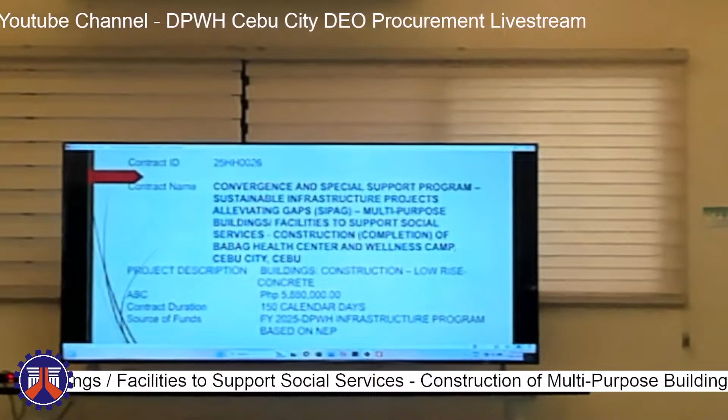5,880,000, with contract duration 150 calendar days. Source of funds, FY 2025, DPWH Infrastructure Program, based on NEP.

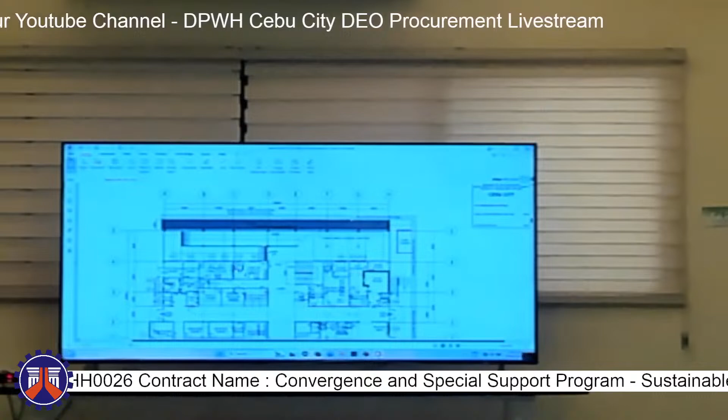To discuss the scope of works, here is the existing building. So the main scope is to just continue the existing slope protection located at the rear side of the building, on this side, for 26 linear meters, continuing the existing slope protection found on the right side of the building.

For the items, we have A1.16, provision of combined field office. A1.115, operation and maintenance of the temporary field office for the engineer. Part B, B3, permits and clearances. B5, project billboard signboard. B7.1, occupational safety and health program.

B9, mobilization and demobilization. B20, temporary fence. The temporary fence is needed since it's inside the school premises — not exactly inside, but near a school, where students pass by, so we need a temporary fence. For Part C, earthworks: 801.1, removal of structures and obstruction.

803.1A, structure excavation, for the footing of the slope protection. 804.1A, embankment of structure excavation. 804, gravel fill. 1601, fill and backfill.

And Part D: 901C1, structural concrete for the slope protection. 901C2, structural concrete for footings and slab on fill. 902.1B, reinforcing steel deformed, grade 60. 903.2, formworks and falseworks.

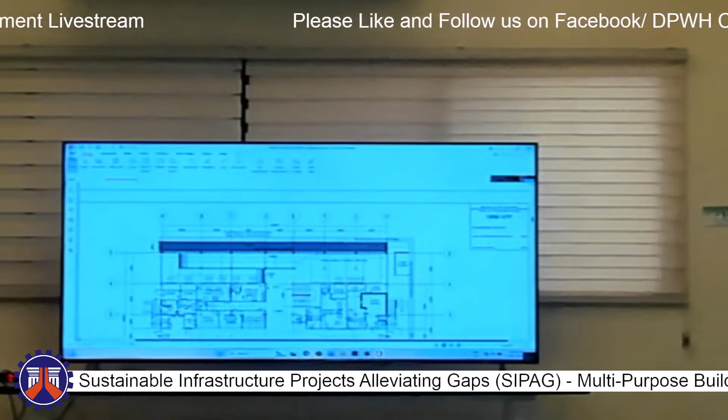So first, the 26 meters slope protection. Also the concrete slab to be placed and the trench drain, at the back of the building.

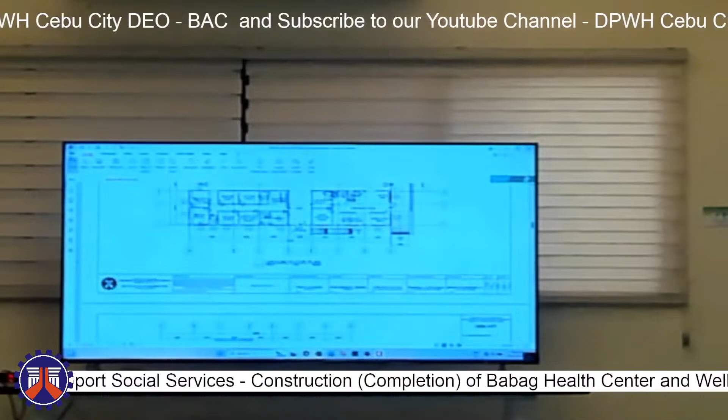For the doors, 1 unit of D11 located at the second floor, this side of the building at the back.

Next is for the unglazed tiles. Unglazed tiles are located at the ramp and the comfort rooms, the ramp area and all comfort rooms on the floor.

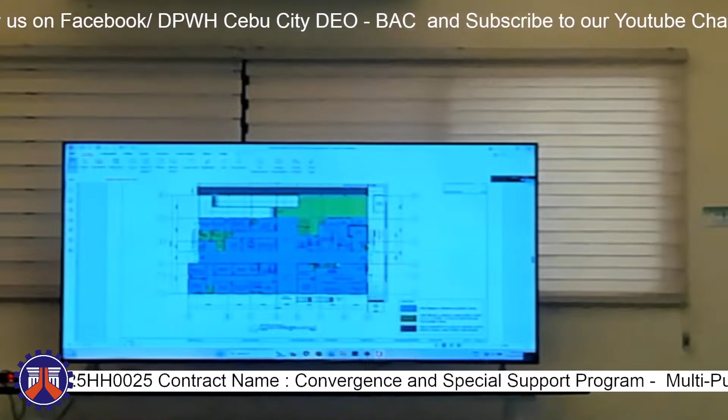And then for the glazed tiles, located at the ground floor. Same thing, ground floor, this area.

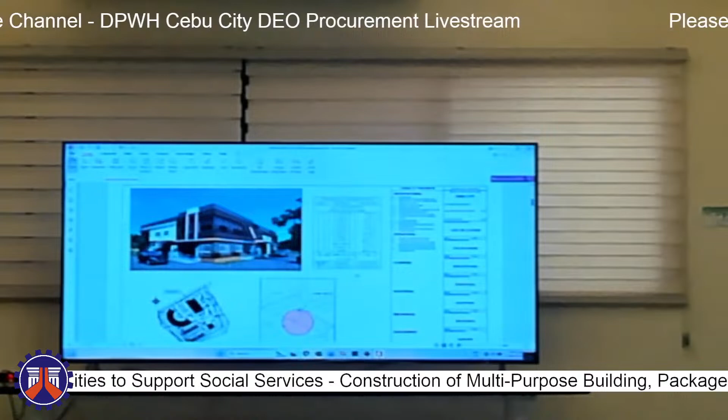That's all for buildings. I will give the mic to Engineer Silva to discuss the roads and bridges. Thank you.

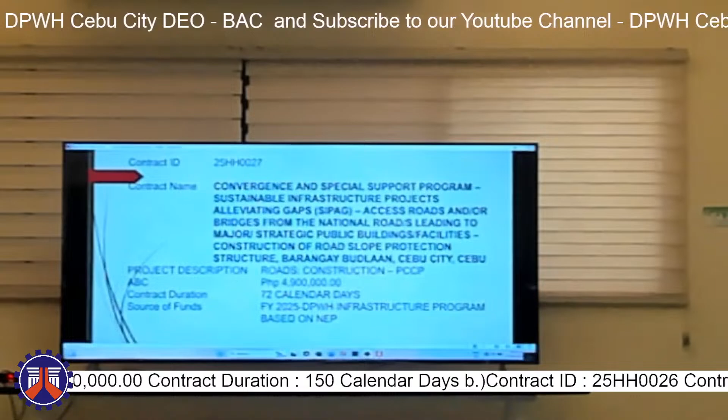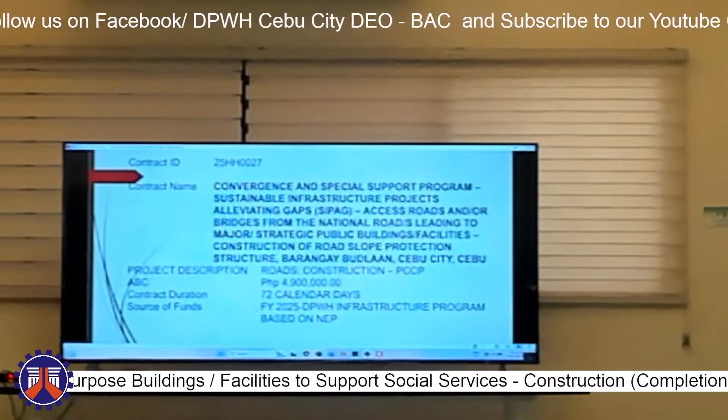Good morning everyone. I will be presenting to you contract ID 25HH0027 with the contract name Convergence and Special Support Program, Sustainable Infrastructure Projects Alleviating Gaps, or SIPAG. Access roads and or bridges from national roads leading to major strategic public buildings and facilities, construction of road slope protection structure, Barangay Budlaan, Cebu City. The project has an ABC of 4,900,000 with 72 calendar days, and the source of fund is NEP 2025.

So as for the plan, there will be 2 sections as presented on the first page, with the net length of 875 meters. The next page shows us the road plan.

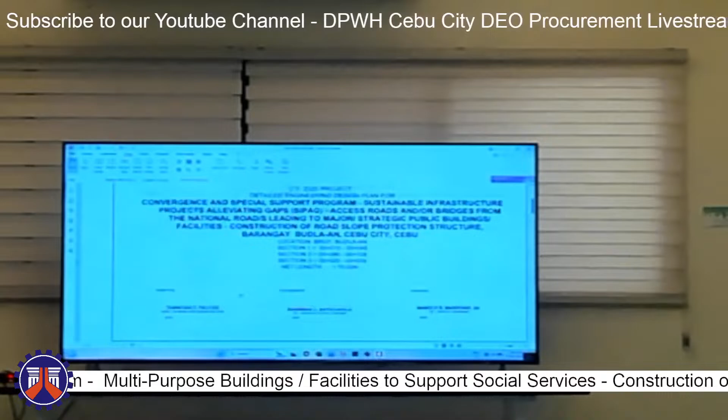My bad. So for the slope protection, the net length is 70 meters with 3 sections as presented on this page. The next page shows the project limits and the coordinates to properly locate the project.

So as for the quantities and the scope of work, there will be A.1.6 provision of combined field office for the engineer, A.1.115 operation and maintenance of a temporary field office, laboratory and living quarters building for the engineer, B3 permits and clearances, B410 miscellaneous survey and staking, B5 project billboard and signboard, B7.2 occupational safety and health program, B81 traffic management, B9 mobilization and demobilization, 103.6A pipe culvert and drain excavation, 404.1A reinforcing steel, 405.1A3 structural concrete, and 506.1 stone masonry.

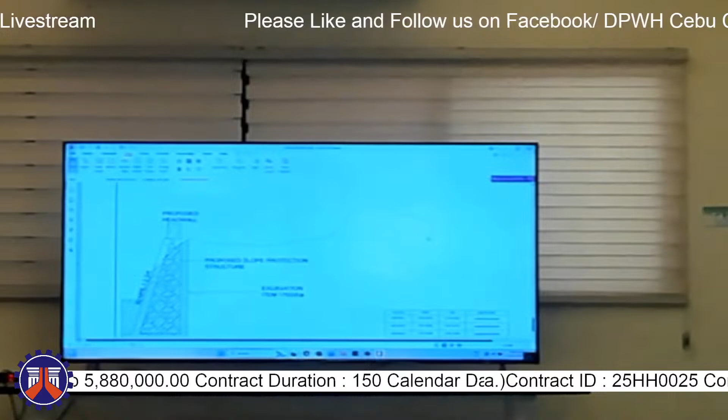So the scope of work aims to provide slope protection, as the title suggests, with 3 sections: Section 1 with 30 meters, Section 2 with 25 meters, and Section 3 with 15 meters. The next pages will show us the technical specifications for each item presented from the previous page. And this is the typical section for the project and the specific locations of each section. I will give the mic to Engineer Lance for the next project.

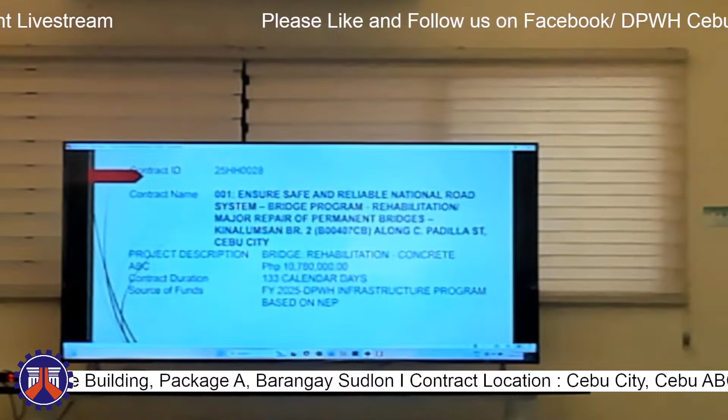Good morning everyone. My name is Engineer Lance Noel Manlosa, and I will be discussing project ID 25HH0028, ensure safe and reliable national road system, bridge program, rehabilitation or major repair of permanent bridges, Kinalumsan Bridge 2, B00407, CB along C. Padilla Street, Cebu City. Project description: bridge rehabilitation, concrete. Approved budget of contract: 10,780,000 pesos. Contract duration: 133 calendar days. Source of funds: fiscal year 2025 DPWH infrastructure program based on NEP.

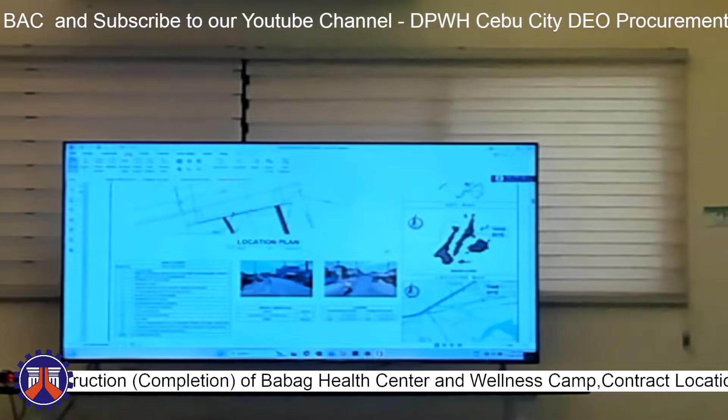So for the title, we have a location in Cebu City, station limits of KM 04234, bridge length of 27.3, and net length of 32 meters. In this page, we can see the location plan of the project, and then we can see the project limits with the corresponding coordinates of the start and end. And the project is located in C. Padilla, wherein the landmark is the Gaisano Grand High Alay, which is very popular for selling lechon, baboy, and manok.

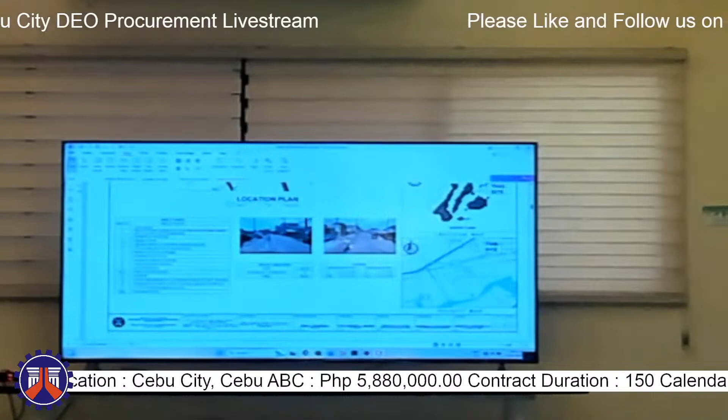And next is the summary of quantities. So for A116, provision of combined field office for the engineer. A1115, operation and maintenance of the said office. Next is the permits and clearances, bridge survey and staking, project billboard or signboard, occupational safety and health program, traffic management, mobilization and demobilization, removal of actual structures or obstruction, 0.05 m thick ECP, emulsified asphalt, bituminous concrete surface, wearing course, hot laid 50 mm thickness. And next is paint, expansion joint 50 millimeters gap, steel finger type, reflectorized thermoplastic pavement markings in white and yellow. Next is patching. So in general notes, we can see here the specifications and notes for the said project.

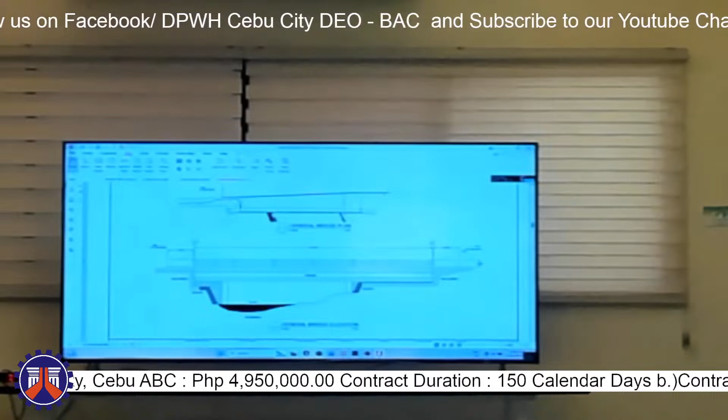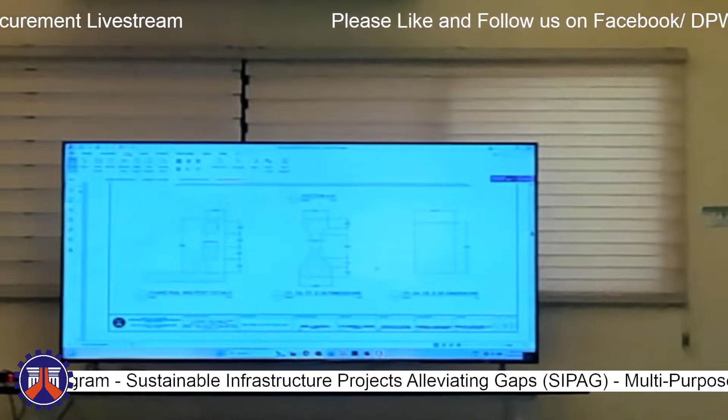And this is the general bridge plan and the general bridge elevation. So this project focuses only on the upper side of the deck slab, wherein we will be tackling the repair of the asphalt of the carriageway and the fixing of the concrete railings and sidewalk. So this is the cross-section of the bridge, showing the typical railings for the said bridge, the guardrail, and the other dimensions. So I will be passing the mic to Engineer Geraldson.

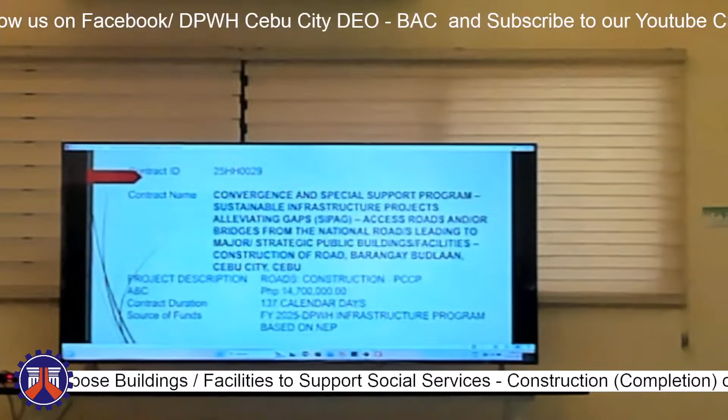Good morning, everyone. I am Engineer Geraldson Tan, and I am the designer for this project with contract ID 25HH0029, contract name Convergence and Special Support Program, Sustainable Infrastructure Projects, Alleviating Gaps, Access Roads and or bridges from the national roads leading to major strategic public buildings, facilities, construction of road, Barangay Budlaan, Cebu City, with approved budget of contract 14,700,000 and contract duration of 137 calendar days.

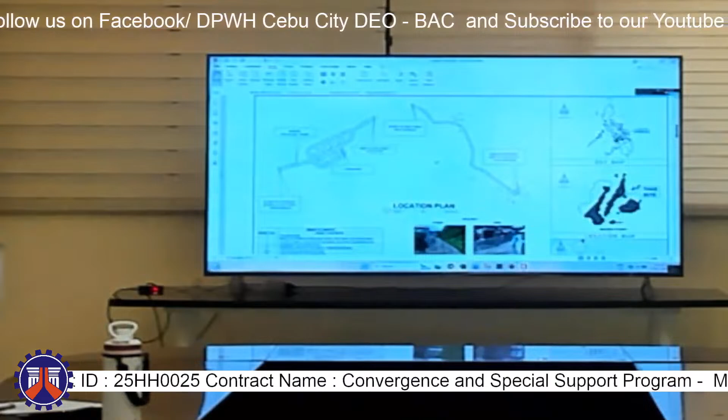This project has 2 sections with station limits 9,400 to 9,493, 9,500 to 9,610, 9,520 to 9,713, 9,660 to 9,720, and for section 2, 12,500 to 12,919, with a total length of 875 meters.

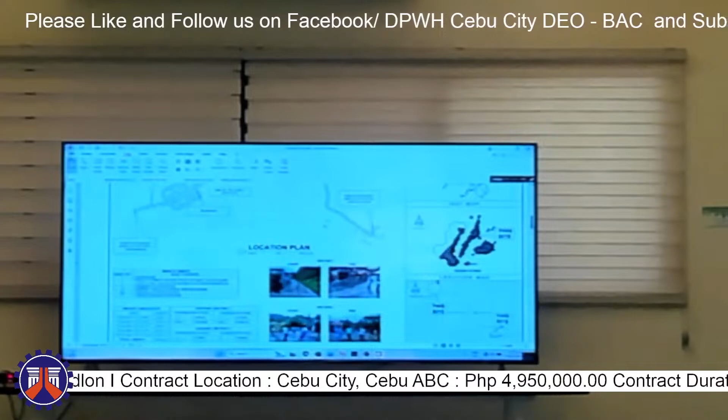So here is the location map. Section 1 is located at NHA, and section 2 has its coordinates here for geotagging.

I will now proceed to the scope, discussing the main scope of work. We have removal, item 1013B3, removal of actual structures and obstruction, then surplus common excavation, structure excavation, pipe culvert and drain excavation, gravel fill, subgrade preparation, aggregate sub-base course, PCCP unreinforced 0.20 meters thick, 14 days.

Then for the drainage, we have reinforcing steel, structural concrete, then pipe culverts. Section 1 involves the removal, structure excavation, and pipe culvert. Section 2 involves PCCP only. We also have stone masonry for section 1, and concrete curb for section 1 also.

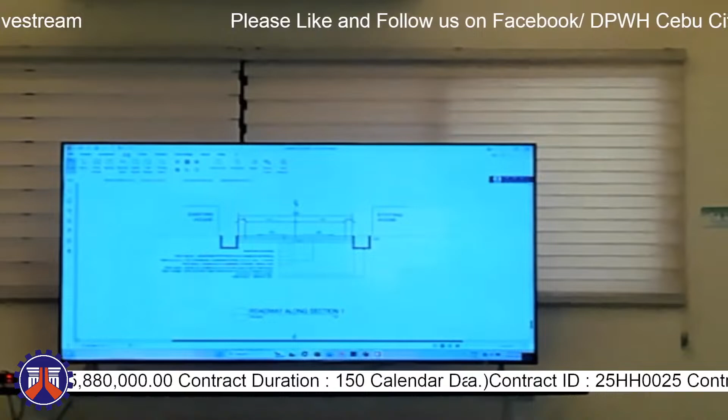To get more into detail, we have the typical road section. This is the typical road section for section 1. As you can see, the subbase is 0.20 meters thick, and it has a width of 5 meters only, with line canals on both sides.

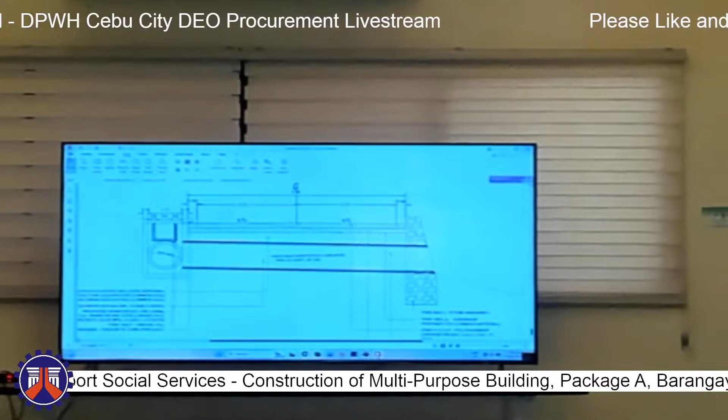The next project would be contract ID 25HH0030, with contract name SIPAG Access Roads and or Bridges from the national roads leading to major strategic public buildings, facilities, construction of road, Barangay Top, Cebu City, with an ABC of 14,700,000 and 137 calendar days.

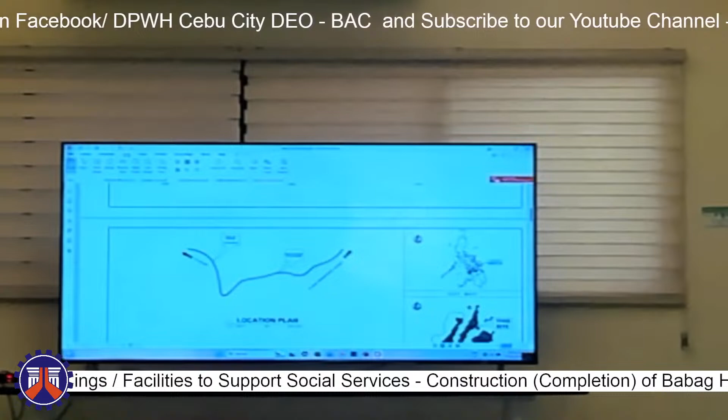The project has station limits of 22,000 to 22,656, with a net length of 656 meters. This is the location of the project, and geotag photos are provided, with specific coordinates for the start and the end also provided.

As for the quantities, the usual items from A.1.16 to B9 are still there, and then as for the specific items, there will be item 1013B3, removal of PCCP, item 1016, removal of structures and obstruction, 102.2 surplus common excavation, 103.1A structure excavation common soil.

103.6A pipe culvert and drain excavation, 104.1A embankment from roadway excavation, 104.7 gravel fill, 105.1A subgrade preparation, 200 aggregate subbase course, 311B1 PCCP 0.2 thickness, 14 days, 404.1A reinforcing steel, 405.1A3 structural concrete, 501A3 pipe culvert, 506.1 stone masonry and metal guardrail and metal beam end piece.

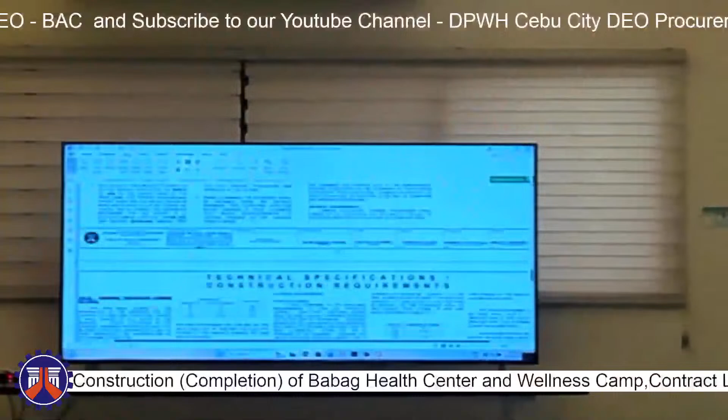The scope of work would be using 200 mm thickness PCCP and 200 mm subbase, and the net length is 656 meters. This is the technical specifications of the project, and this is the typical section of the project. The width of the road is 5 meters, and certain portions would have line canal on the right side.

I will give the mic to Engineer PJ for the next project.

Good morning. My name is Engineer Yara. I'm here to discuss the plan for the bridge along Tres de Abril Street, and the net length is 24 meters.

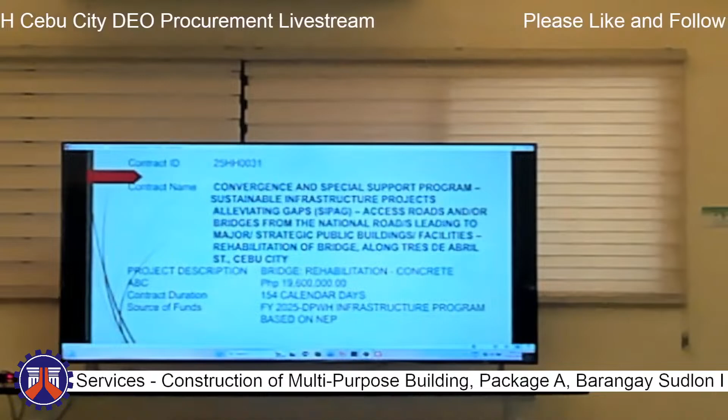The contract name is the Convergence and Special Support Program Sustainable Infrastructure Projects Alleviating Gaps, SIPAG, access roads and or bridges from the national roads leading to major strategic public buildings, facilities, rehabilitation of bridge along Tres de Abril Street, Cebu City. Its ABC, or approved budget of contract, is 19,600,000. Its contract duration is 154 calendar days, and its source of funds is based on 2025 NEP.

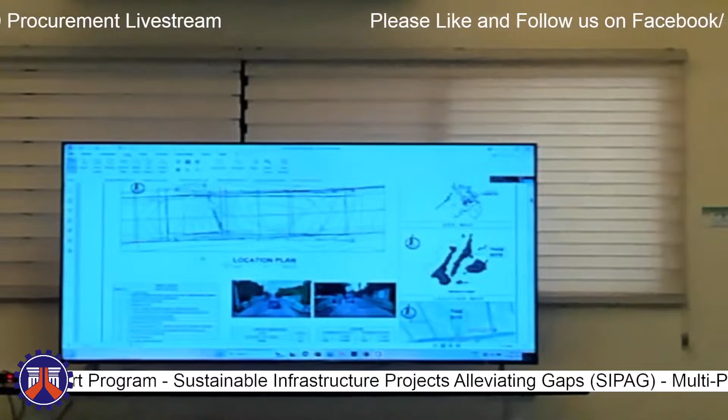So the location of the project is at the back of CIT, along Tres de Abril Street, and its coordinates are seen in the plan, and its length is 24 meters.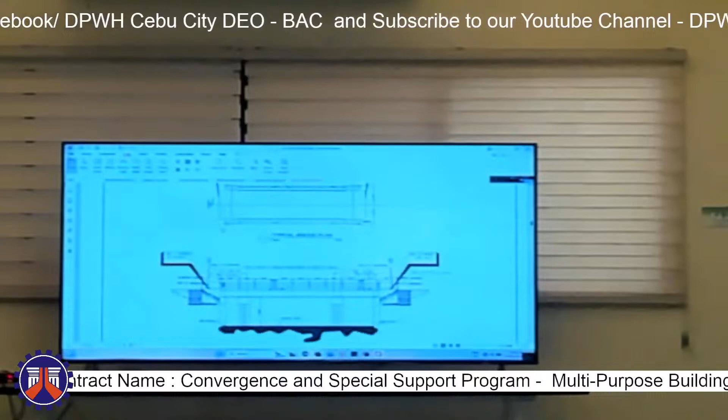To jump to the direct scope of works, we have the removal of obstruction for the expansion joint and for the asphalting. We also have the embankment, and emulsified asphalt or asphalting for the bridge, and we will also be providing scour protection for the river. For the underslab and the girders, we're going to provide carbon fiber sheet, carbon fiber plate, and also paint for the railings. Here's the elevation plan which we will be following for the project.

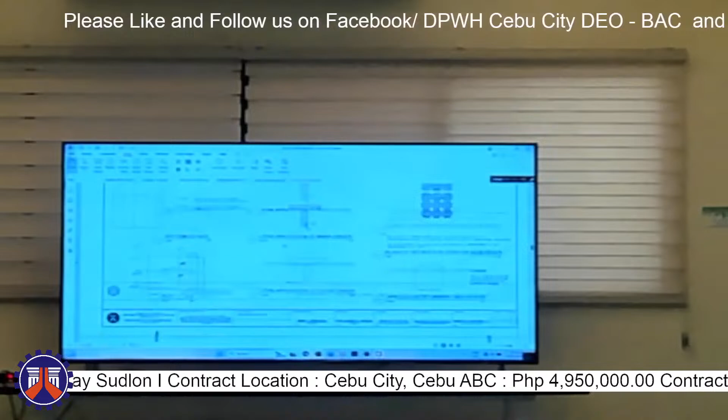So this is where the protective coating will be inserted, also for the carbon fiber sheet and plate to be implemented. This is also the general bridge section and railing details where the paint will be implemented, and also the portion where the carbon fiber sheet and plate will be installed. This is also the expansion joint location wherein we will stabilize the bridge.

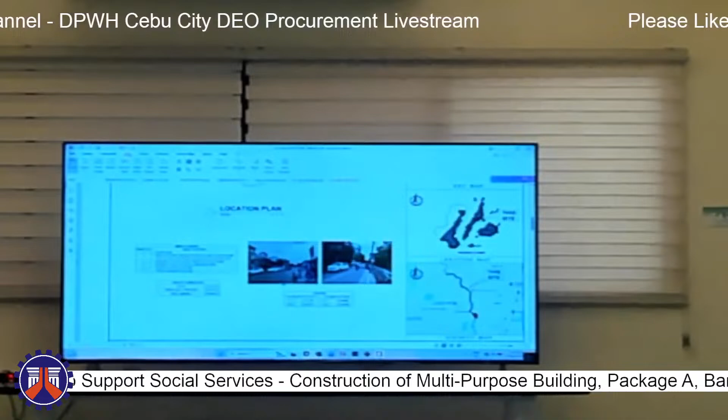The location of the project is at Cebu Trans-Central Highway. The net length is 2,445 meters. Start of project is near the junction of Salinas and Gorordo, and the end of the project is at Kilometer 7 near Ruma Hotel.

These are the summaries of quantities. We have provisions of combined field office, laboratory, and living quarters building for the engineer, operation and maintenance of the temporary field office, laboratory, and living quarters building for the engineers, permits and clearances, miscellaneous survey and staking, project billboards, signboards, occupational safety and health program, traffic management, mobilization and demobilization, removal and relocation of utilities, removal and installation of existing solar studs, removal of structures and obstruction, concrete, surplus common excavation, subgrade preparation, aggregate sub-base course, PCCP pavement unreinforced, 300 mm thick, 7 days.

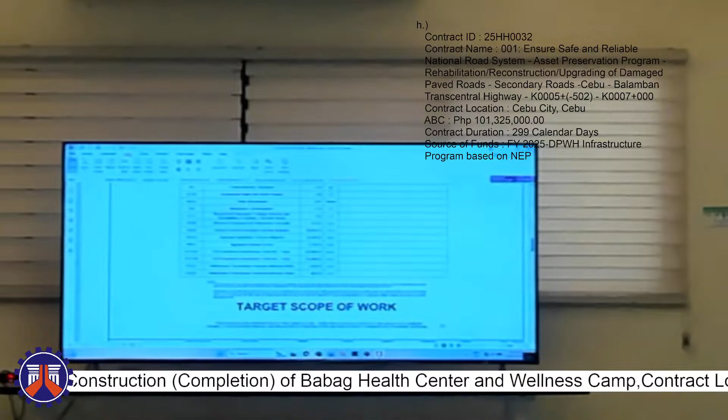Target scope of work: this plan involves construction of 2 lanes of 8.3 meter to 18.8 meter width with 300 mm thick PCCP and 200 mm thick sub-base course. It also includes removal and relocation of existing studs and application of thermoplastic pavement markings.

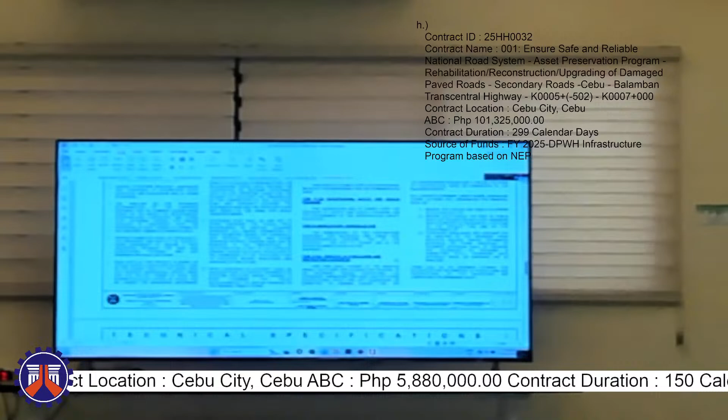This is the general notes and technical specifications of our items involved. And this is the typical road section. We have our subgrade preparation, PCCP, 200 mm thick sub-base, and on the side we have the existing sidewalk and existing curb and gutter.

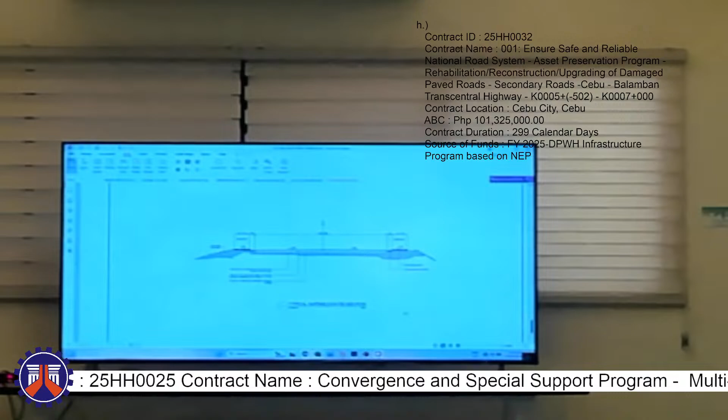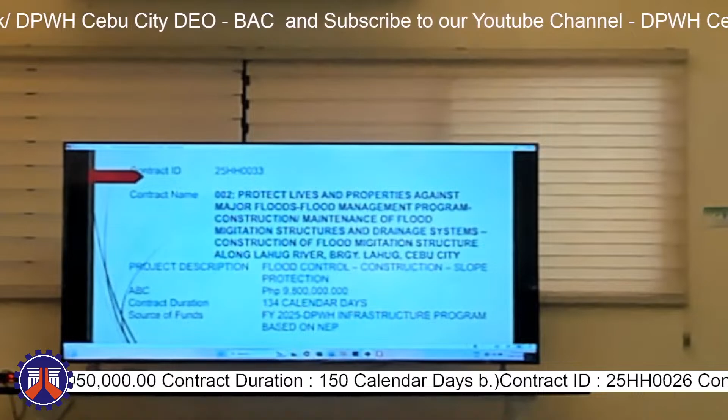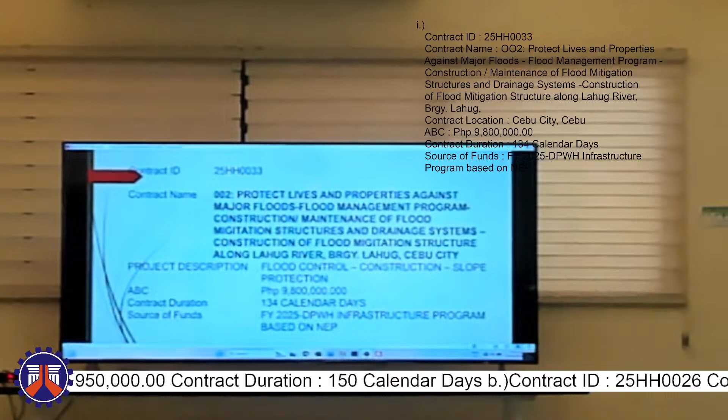Good morning everyone. For contract ID 25HH0033 with contract name 002, Protect Lives and Properties Against Major Floods, Flood Management Program, Construction, Maintenance of Flood Mitigation Structures and Drainage Systems, Construction of Flood Mitigation Structure along Lahug River, Barangay Lahug, Cebu City, with a project description: flood control, construction, slope protection, with approved budget for the contract of 9,800,000, with contract duration of 134 calendar days. Source of funds: FY 2025 DPWH infrastructure program based on NEP.

For this project, it is located along Lahug River, Barangay Lahug, Cebu City, with a net length of 57.6 meters. Geotag photos are provided for the location of the project.

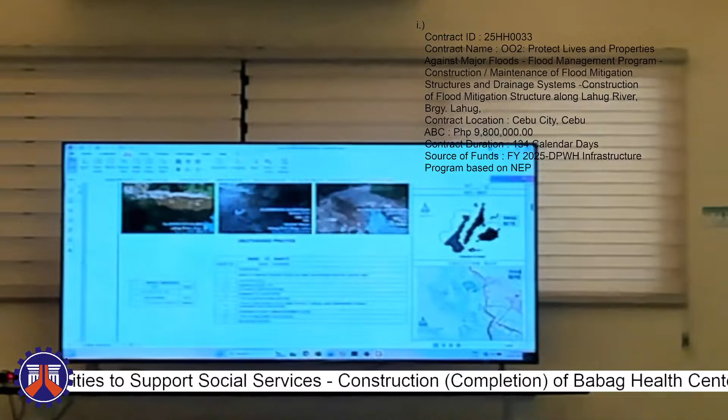This is the location map of the project showing the start of section 1, station 0139.33, and end of section 1, station 0196.14.

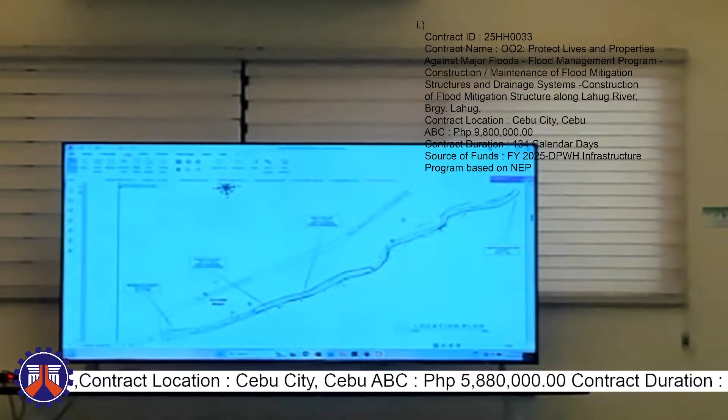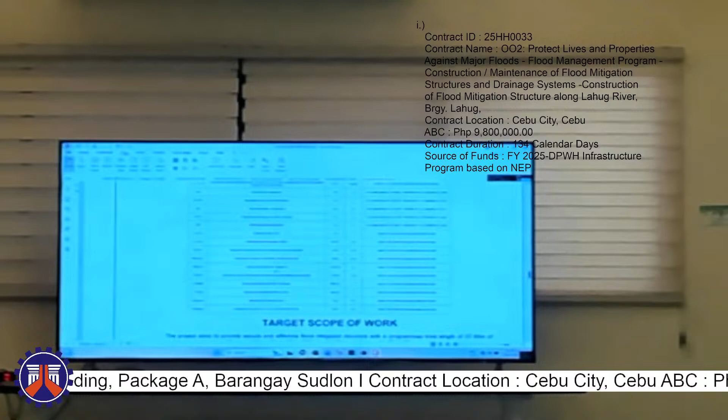This is the general notes and technical specifications for this project. For the summary of quantities, we have provisions of combined field office, laboratory, and living quarters building for the engineer, operation and maintenance of the temporary field office, laboratory, and living quarters building for the engineer, permits and clearances, miscellaneous survey and staking, project billboard, signboard, occupational safety and health program, mobilization, demobilization, detour access road, geotechnical investigation soil, removal of structure and obstruction including disposal, structural concrete 20.68 MPa, Class A, 28 days, reinforcing steel bars grade 40, surplus common excavation for channel excavation including disposal, structural steel sheet piles furnished, structural steel sheet piles driven, and manholes 910 mm diameter, and concrete cover 0.5 by 1 by 0.075.

The target scope of work for this project is that this project aims to provide secure and effective flood mitigation structure with a program total length of 57.6 meters of structural steel sheet piles, Z-type, with capping beams for the right river bank.

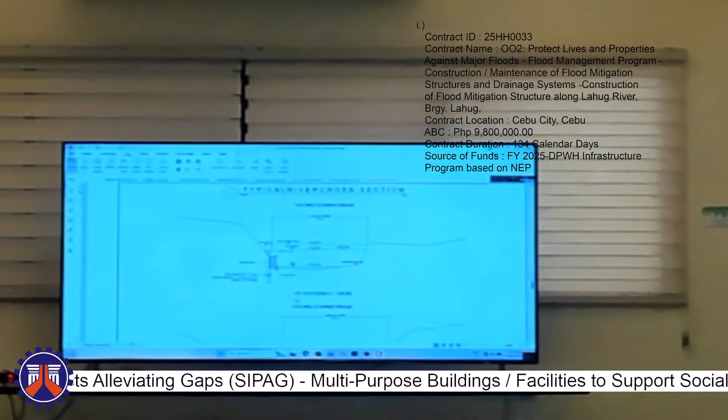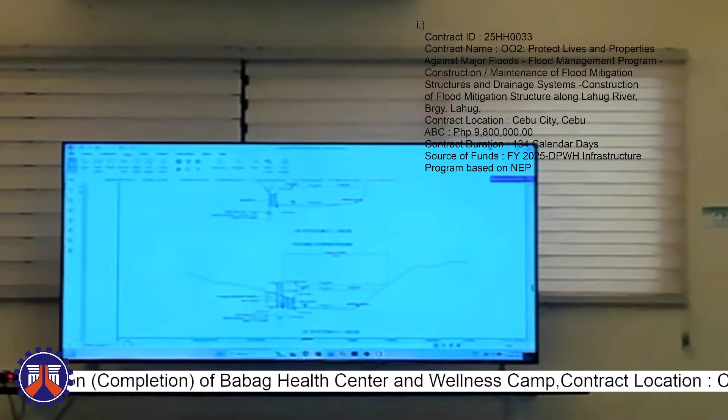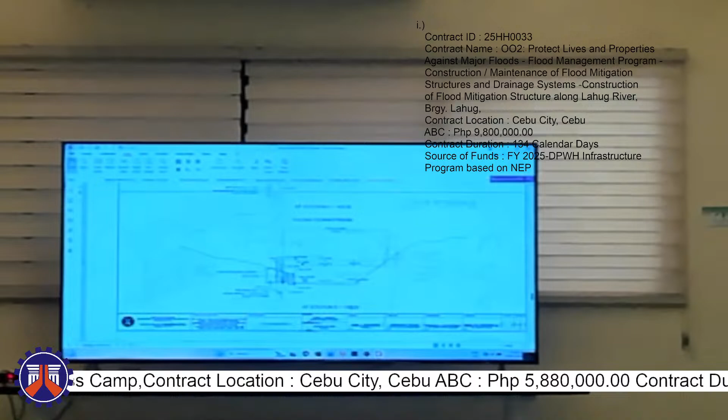So for the typical section for this project, the first section shows the pile capping and the structural steel sheet pile, and the next section shows the section for the manhole as well as the steel sheet pile and the concrete structure. Here are the details as well for the pile capping and the structural sheet pile connection, and for the manhole as well. That's it for this project.

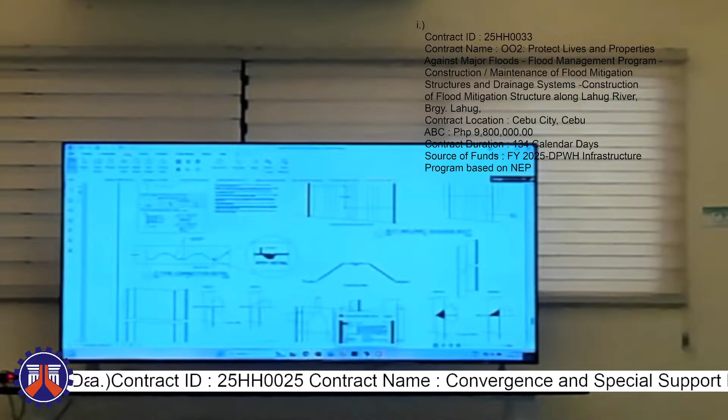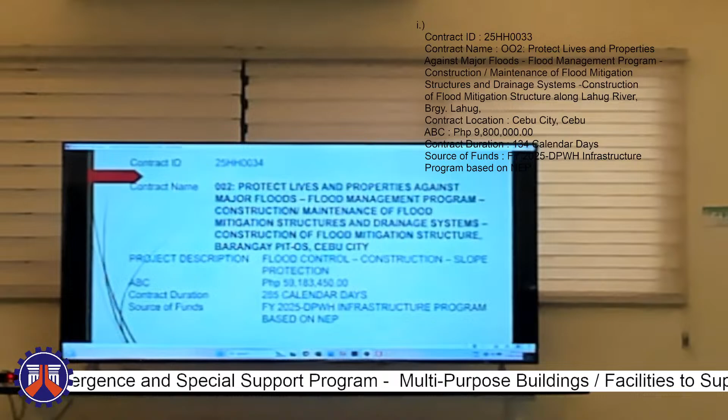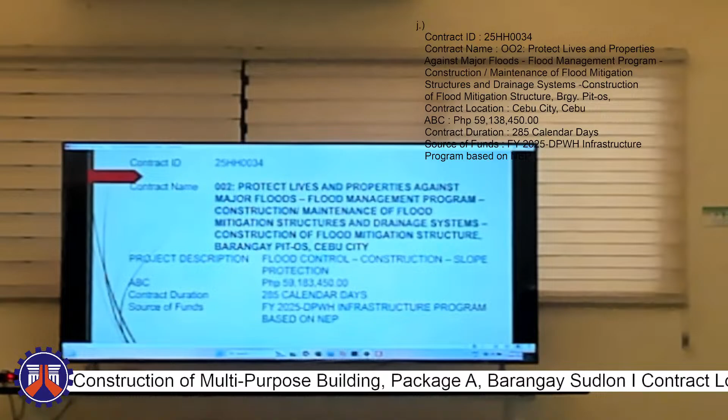Good morning, everyone. I'll be discussing contract ID 25HH0034, contract name 002 Protect Lives and Properties Against Major Floods, Flood Management Program, Construction Maintenance of Flood Mitigation Structures and Drainage Systems, Construction of Flood Mitigation Structure, Barangay Pit-os, Cebu City.

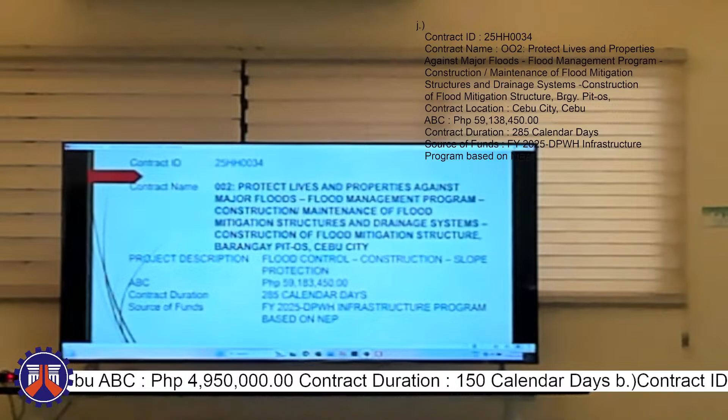The project description is flood control construction slope protection with an ABC amount of 59,183,450 pesos. The contract duration is 285 calendar days, and the source of funds is FY 2025 DPWH Infrastructure Program based on NEP.

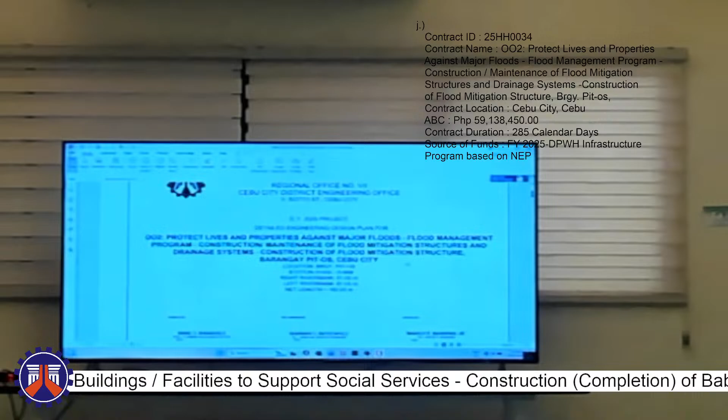For this project, the location is within Barangay Pit-os with station limits of 000 to 989, with a right river bank of 81 meters, left river bank of 81 meters, and a total net length of 162 meters.

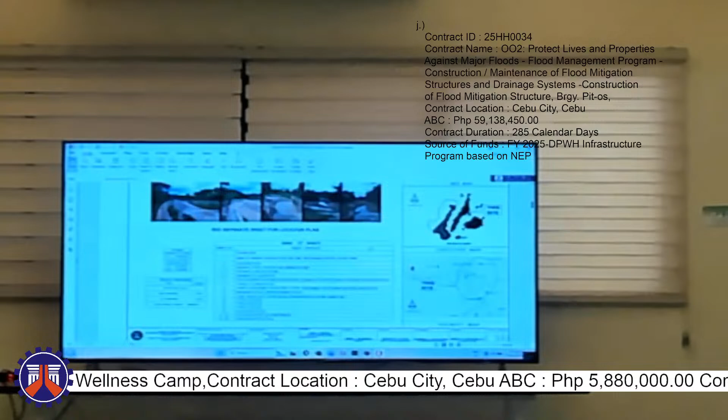So the location of this project, the landmark is near, within Camella Miramonte, going to Camella Riverdale, Barangay Pit-os. For the exact location, we provided in the plan the geotag or the coordinates.

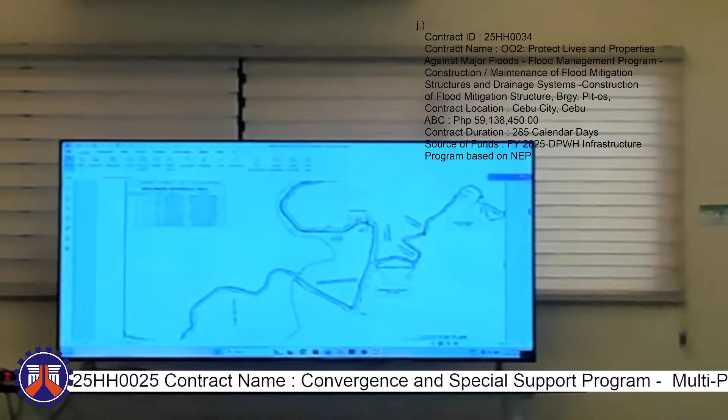This project is a continuation project of FY 2024. This is the tributary, this is the Butuanon River, then this is the Camella Miramonte, and this is the Camella Riverdale Bridge.

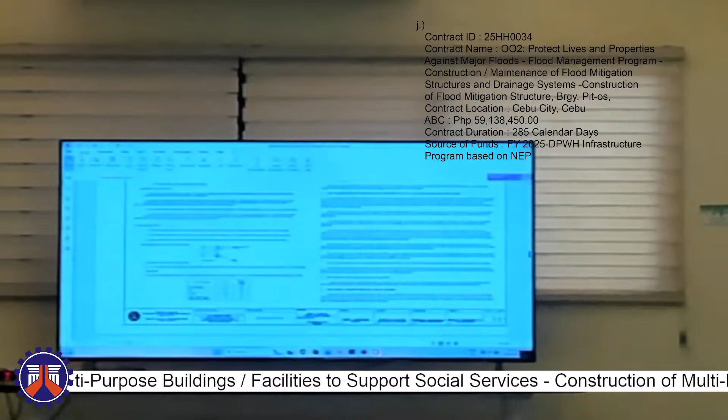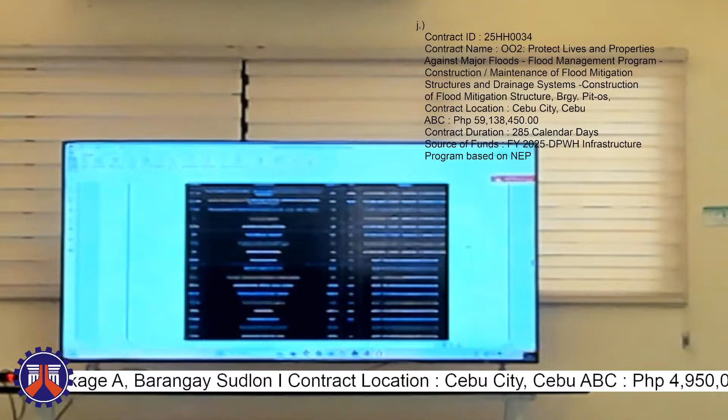For the scope of this project, we have the A116 provision of combined field office, operation and maintenance of the temporary field office, provision of communication facility for the engineer, 1 unit laptop and 1 unit cell phone, permits and clearances, miscellaneous survey and staking, project billboard, signboard, occupational safety and health program, mobilization or demobilization.

We also consider the detour and access road, geotechnical exploration, removal of structures and obstruction, structural concrete, reinforcing steel, pipe culvert, and drain excavation, fill and backfill, grouted riprap, structural steel sheet piles furnished and driven, pipe culverts with a 910mm diameter, concrete cover, and the manhole.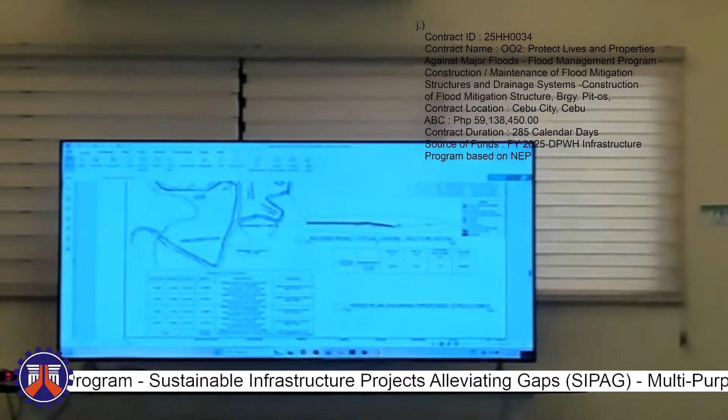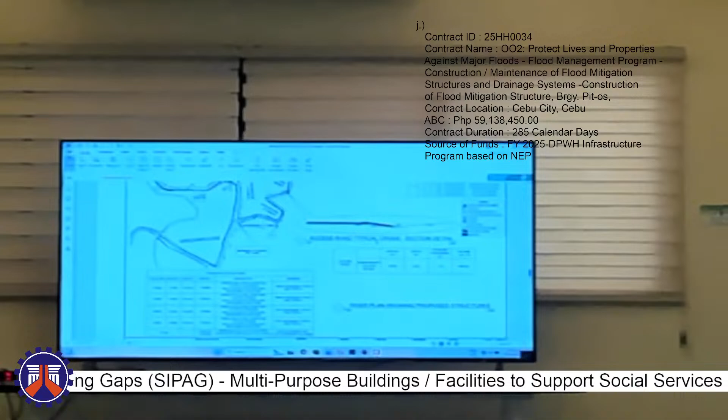For the 2024 project, the location is 02295. Since this is a continuation, it will start from 295 to 383 in this area. We also have a drainage outfall in station 383, on the right river bank and the left river bank.

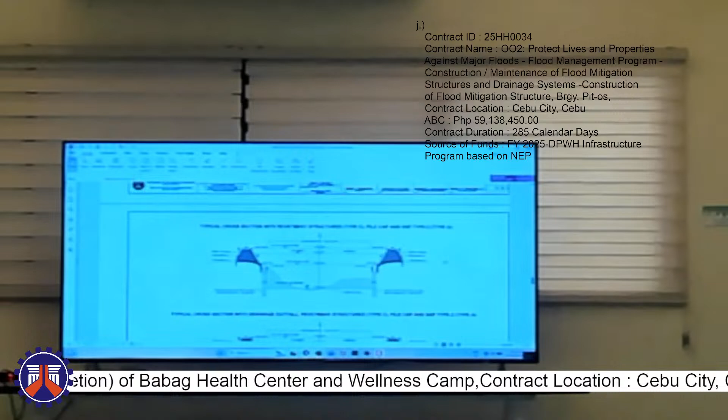For the typical cross-section, this is the steel sheet pile, and this is the concrete pile cap with a wall, revetment wall structure, on both sides, left and right. This is also the typical cross-section for the drainage outfall.

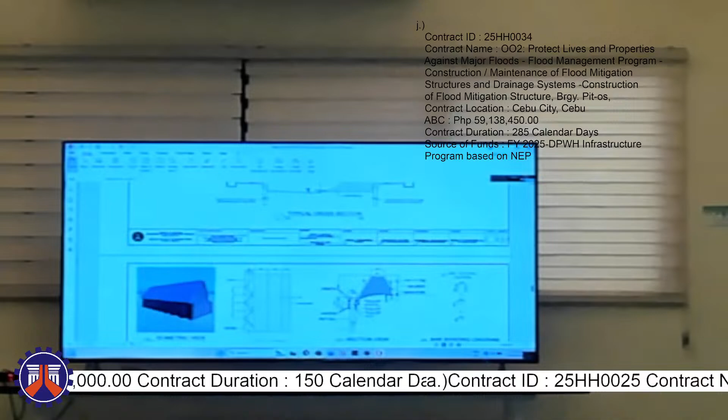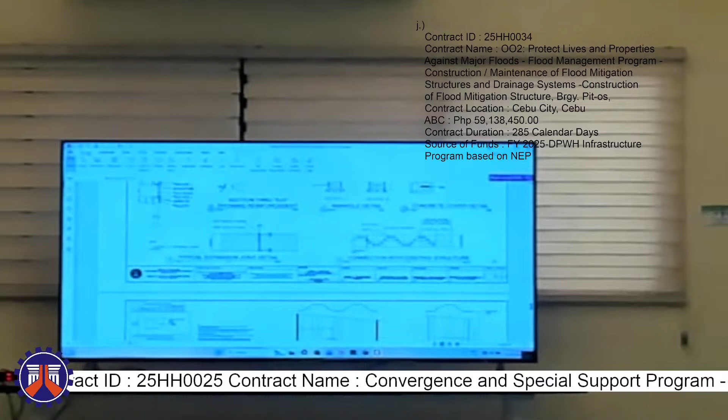These are the details of the pile cap and the steel sheet pile, and the drainage outfall details, and the Z sheet pile. This is the grouted riprap for the end protection details. That's all, and I will give the floor to Engineer Oriel for the next project.

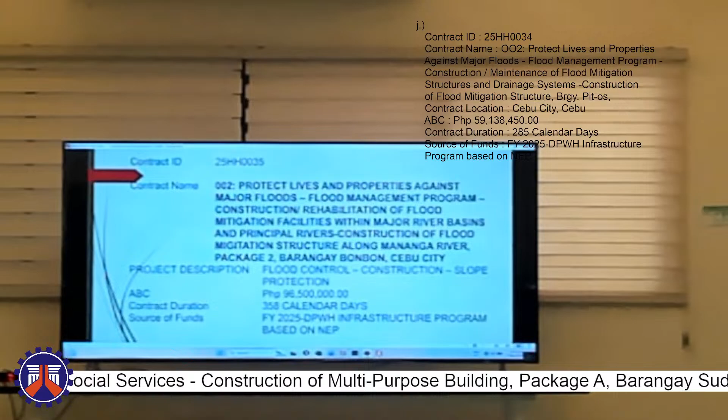Good morning, everyone. I'm going to present contract ID 25HH0035 with contract name Protect Lives and Properties Against Major Floods, Flood Management Program, Construction Rehabilitation of Flood Mitigation Facilities within Major River Basins and Principal Rivers, Construction of Flood Mitigation Structure along Mananga River, Package 2, Barangay Bonbon, Cebu City.

Project description: flood control, construction, slope protection with ABC of 96,500,000. Contract duration is 358 calendar days. Source of funds is FY 2025 NEP.

So we have 830 meters from each river bank. The total length of the project will be 1,660 meters.

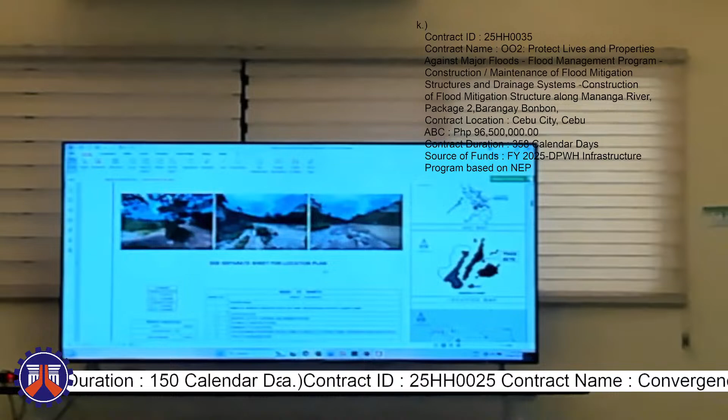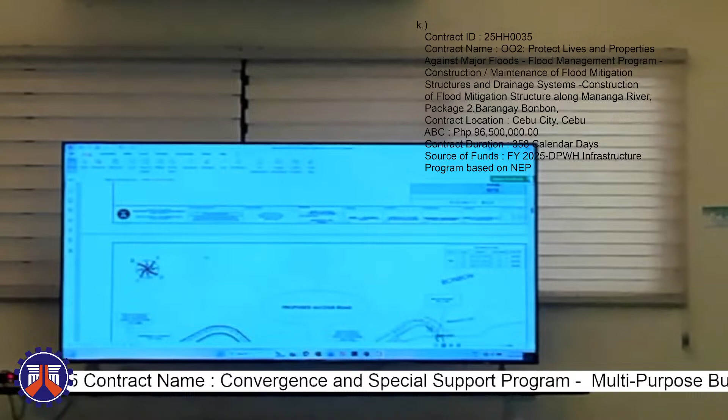Here we can see the geotag pictures, and we can also see the coordinates so that you can Google it and see the exact location of our project. This is the location plan and the detailed location plan of our project.

We're going to start at station 00 and at station 830. So we have equal lengths for both sides of the river bank. The next pages are just the general notes and the specifications.

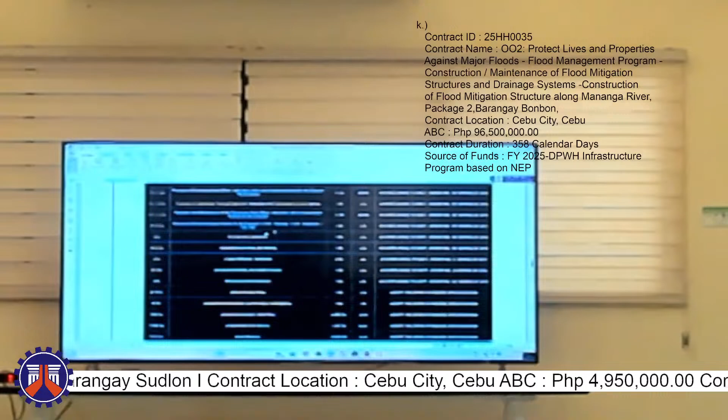For the summary of quantities, we have the usual items here, so I'm going to jump to the major items that we are going to consider: structure excavation of hard rock, embankment from borrow, stone masonry, gabions, 1 by 1 by 2.

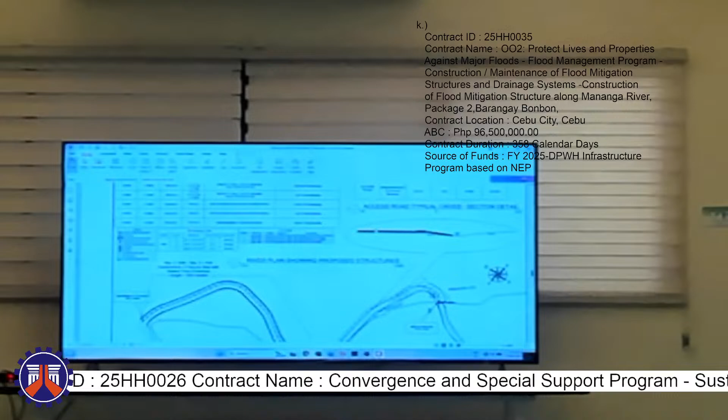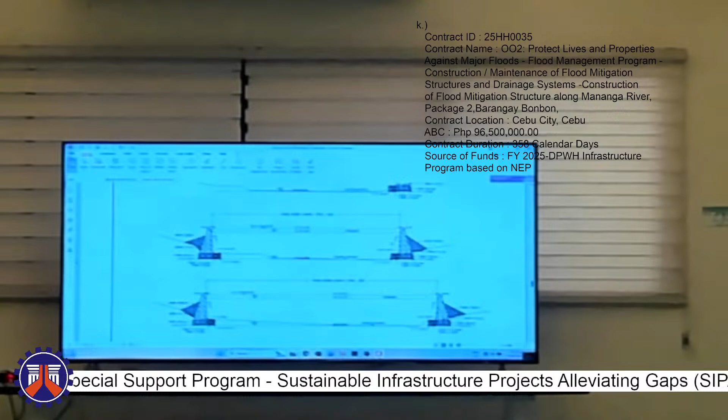Here we have a detailed plan for the access road and the location of the project again. This is the typical cross-sections that we are going to consider, and here are the detailed plans. That's all, thank you.

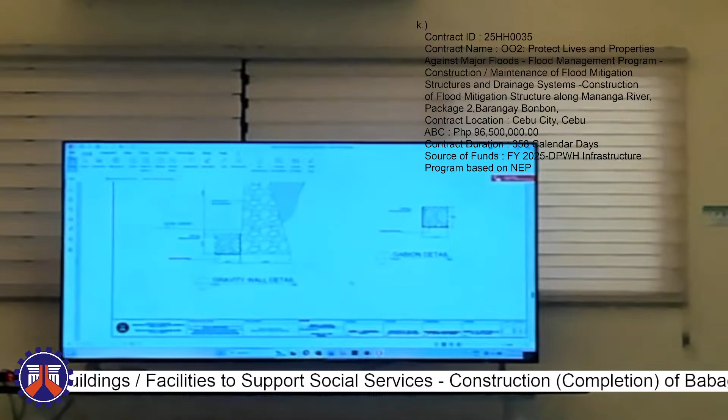Thank you very much to the planning engineers for the discussion this morning. If our audience has any questions regarding the projects... none so far. But you may visit the planning and design office if there are further clarifications on what was discussed for the projects.

Okay, so now we will be hearing some reminders regarding documents to be submitted during the bidding conference. This is a voiceover, so please kindly listen.

Once again, for the additional information for the bidders regarding documents to be submitted, these following requirements will be discussed in the preparation of the documents. First, for the technical proposal, the basic eligibility requirement during submission of bids is the PhilGEPS certificate of registration and membership, which must be current and updated in accordance with the provisions of the IRR, and its registration is proper and relevant to the particular type of procurement.

In lieu of the Class A eligibility documents, uploaded and maintained current and updated in PhilGEPS, bidders are required to submit their PhilGEPS certificate of registration during bid submission.